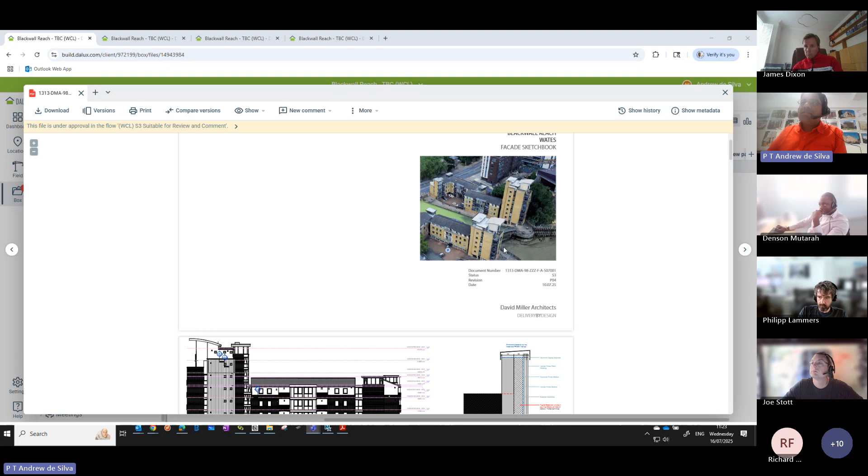So in reality, let's just go back here. Most of the building, there was a fire risk assessment external walls report done by a fire consultant recently. And the works proposed are based on their findings, which is quite limited in this building because most of the facades are brick, non-combustible with mineral wool insulation, etc. But there's a couple of areas of timber cladding. So for example, in this drawing here, see these vertical slats - that's the main area we're looking to replace.

So from our point of view, this is a great project to be working on because it's quite small in terms of the extent of the works. So for us to define, as a collective, the process and procedures and documentation etc., it's much more manageable than a brand new HRB submission, which we've not done before.

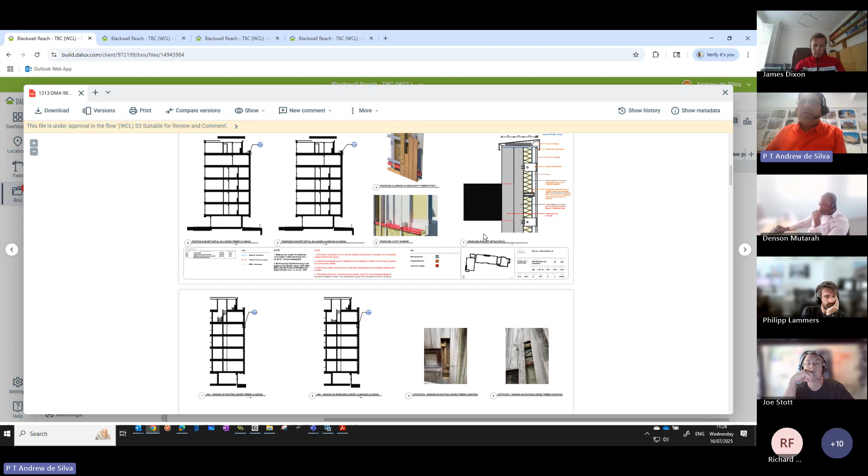So the aim of the sketchbook is to identify, based on the intrusive surveys done for the fire risk assessment report, the existing build-up - for example, this image detail on the right is what we believe is currently the existing build-up, and the one below being a potential replacement. Now what's been quite useful about this approach is that we can see where we don't know things, and that's across the board. You see different photographs from the surveys in different areas. The top image is always existing, and the bottom is sort of proposed.

So we've gone around the building, looked at the findings from the fire risk assessment, and now we're trying to develop an initial set of proposals. But what's been most useful is identifying additional surveys, consultants and specialists that we need. Even though we are only really replacing a small area, which pre-Building Safety Act would have been a much less interrogative process, or less evidence-based project.

But on this project, in terms of consultants, we've got a planning consultant who's got to go through planning, a structural engineer, ourselves as architects and the BSAPD and the CDMPD. Wates are appointing a facade consultant, and also someone to do thermal imaging - the facade specialist to carry out thermal imaging of the building, really to understand what the existing performance is. As I said, we don't exactly know how the building is performing at the moment in terms of U value, which will influence how we deal with the proposed works in bringing it up to refurbishment levels.

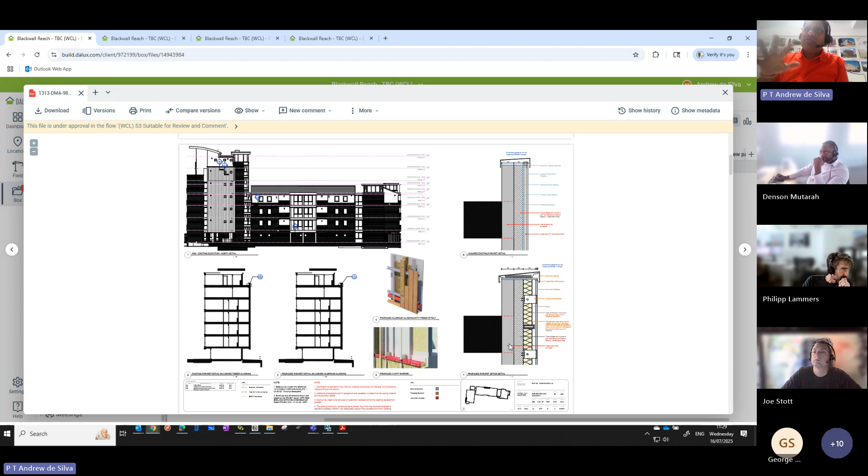We as a design team, as principal designer, as principal contractor, have to be sure of what the existing build-ups are, what their performance, capacity and capability are, to then be able to say what we're putting back in new is still compliant and isn't going to affect the structure or the fire strategy, etc.

So this is the sketchbook, which has been really useful, even on this small extent of work, including balcony and timber deck balconies. It's generated a new set of intrusive surveys to add to the ones already done, for us to better understand. The 3D point cloud survey and the Revit survey model that came from that initiation is doing exactly what a responsible, knowledgeable client, contractor and PD team needs to do going forward.

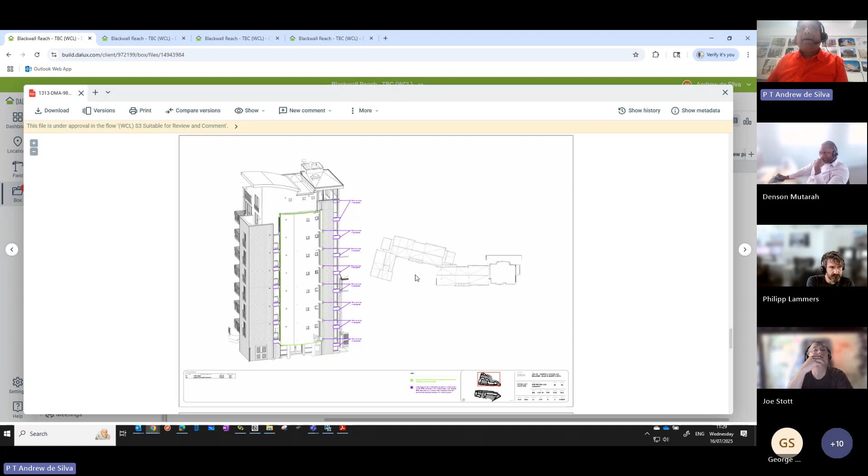Any general questions on what I've shown in the sketchbook? I'll show a couple of other things - we've got a couple of tabs open to show other things we're doing. Anyone got any questions on this?

Just shout out, I can't see everyone. They could put a hand up, but does anyone have any questions on anything I'm showing now? Or should I just carry on? I'll take the silence as a cue to just carry on.

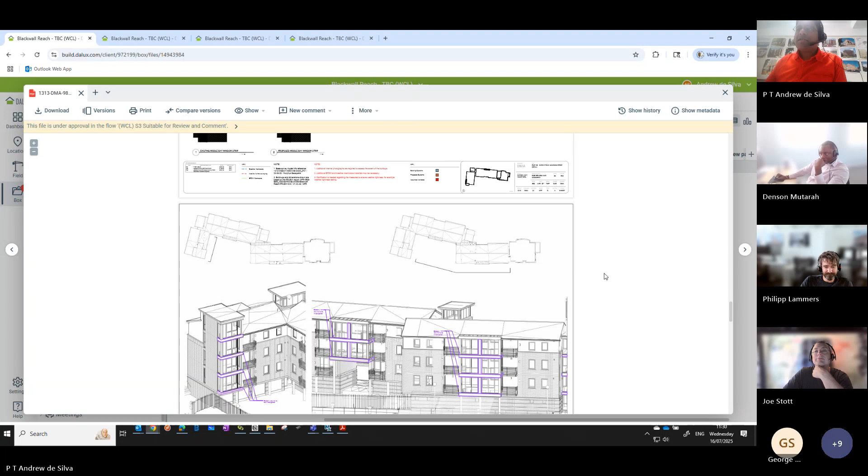A couple of other things that we've done - I think one of the things mentioned was just trying to understand from the beginning what do we need for the gateways.

As I mentioned, we're keen not to just focus on Gateway 2, but actually focus on Gateway 3 and the handover information requirements, and work out - I think a lot of focus goes on the Gateway 2 submission, but actually some of the things in Gateway 3 will influence what we need in Gateway 2 and Gateway 1. So that's the aim.

So what we've done here is generate a Gateway 2 information and checklist, just to make sure we don't miss something obvious that we need to submit. For example, here we've got information about - sorry, there's a bit of delay on my screen scrolling - basic information required in the submission, some basic questions like number of stories, what is the height, what are the uses of the buildings.

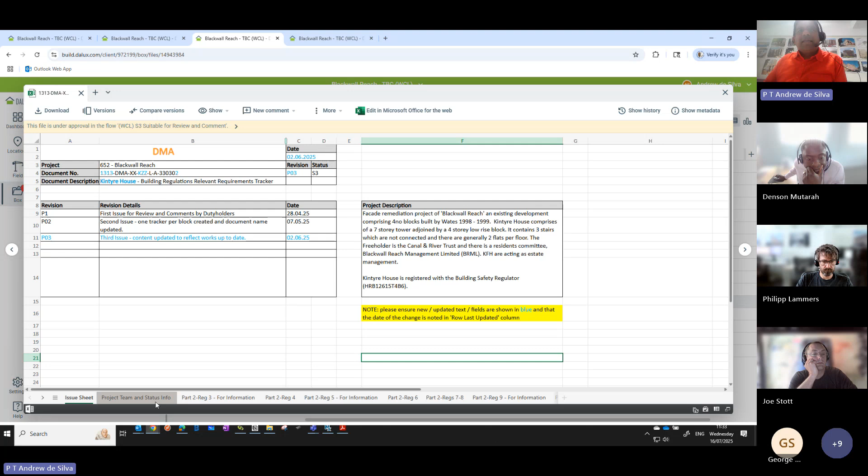A lot of people will have seen this, which is the RIBA building regulations tracker. We're using that across the team to try and capture initial strategy, whether that particular regulation is relevant for the project or not. And if it is, we're trying to go, okay, this is the information we have at the moment, keeping in mind we're at the pre-application stage. Then going forward, asking the various consultants and specialist subcontractors to input into this to demonstrate compliance. I think a lot of people are familiar with this RIBA template tracker.

When it comes to the actual submission for regulation for Gateway 2, the aim is to extract from this the actual clear narrative, which demonstrates yes, this regulation is relevant, and here is the information, the narrative, and the supporting evidence - whether it's manufacturer's information, their certificates, our drawings, our specification - or to say why we think that particular regulation is not relevant. So there's no ambiguity when someone receives this application as to why we haven't done Part M, for example. We're not affecting anything in that sense on this project in terms of the works we're doing. So we will just write a short paragraph or sentence to explain why we believe it's not relevant.

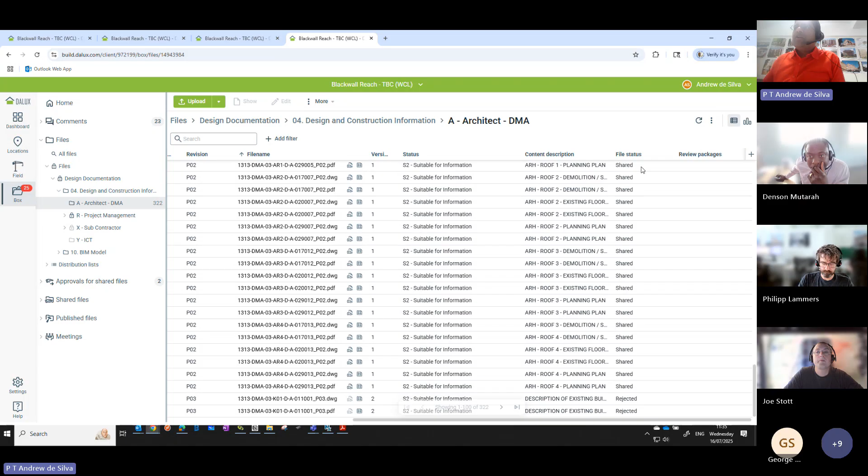Finally, in terms of the common data environment - this is really from Wates that led this - the client doesn't have anything sophisticated like a common data environment set up at the moment. So that's another thing we're looking to talk to them about, to try and upskill, but also agree how we're going to maintain that golden thread when we hand it over at the end of the project. What format do they need it? What format can they read? What information do they want in their health and safety, et cetera. So all of the things we were talking about earlier regarding what the client doesn't know.

For us, it's quite an interesting project because I think it's very typical. There are other people on the call from the client side or asset owners who will probably be able to reflect on that more closely, but I think there are a lot of clients, projects and buildings with a similar kind of scenario. So I think what we and Wates are doing is quite typical, or it's going to be quite typical going forward on a lot of projects - everything from surveys to the consultants and specialists we're appointing, to try and de-risk the gateway process predominantly, but also to make sure our design is compliant going forward. So that's kind of where we are on that particular project.

I'll obviously keep you updated as we go through, but if anyone's got any questions or comments, I'd really appreciate it.